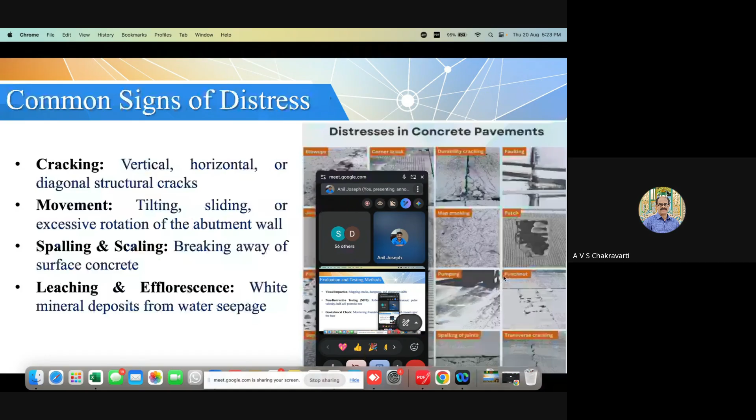So I will start. This is the topic selected for today: From Distress to Stability, Geotechnical Solutions for Infrastructure Projects in Complex Ground Conditions.

I will cover this under four subheadings. First, what is complex ground condition, because any load coming from any structure has to transfer to the foundation and to the soil.

We'll discuss two case studies. One is an embankment failure of a bridge at Mahe Thalassery bypass, and the second is a case study for the protection of a gas pipeline during demolition using the delayed detonation technique for the Supertech Twin Tower at Noida. We will also look into some of the conclusions learned from the study.

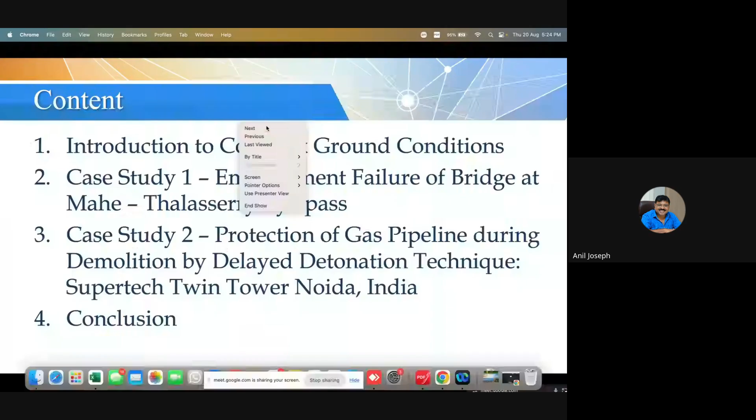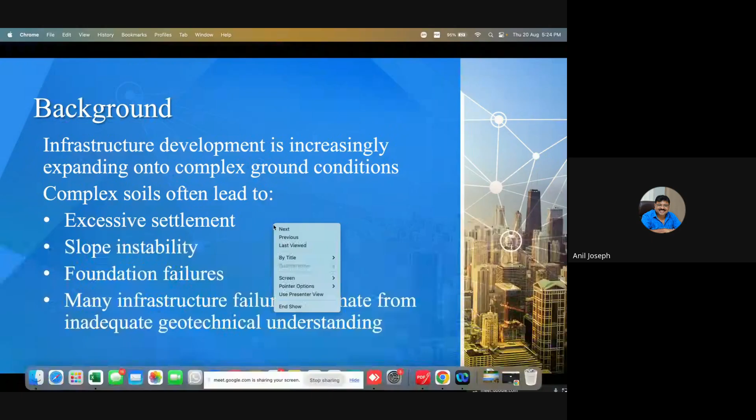Infrastructure development is increasingly expanding onto complex ground conditions. Complex soils often lead to excessive settlement, slope instability, and foundation failures. Many infrastructure failures originate from inadequate geotechnical understanding. So I thought today we would focus on that area, because if you have a strong foundation, you can build very strongly on top of that.

So what is complex ground? Complex ground is soil exhibiting unpredictable or adverse engineering behavior. The common types are expansive soils, soft clays, collapsible soils, organic soil, loose fill, and reclaimed land.

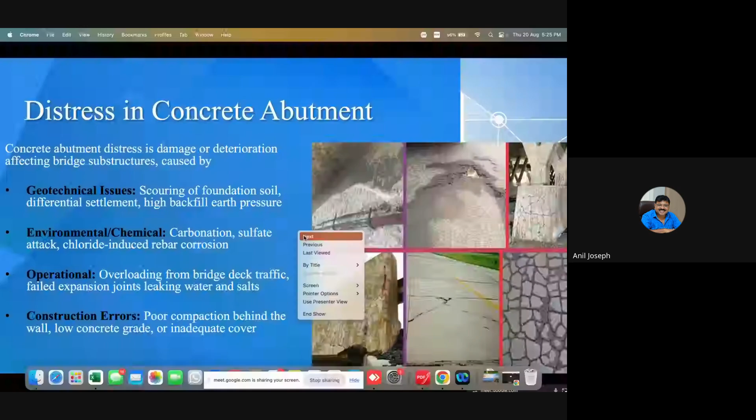Distress in concrete abutments is very common — damage or deterioration affecting bridge substructures caused by geotechnical issues, environmental or chemical issues, and operational issues like overloading from bridge deck traffic or construction errors. These are some case studies where such issues have come up. Common signs of distress in concrete pavements include cracking, movement, spalling and scaling, and leaching and efflorescence.

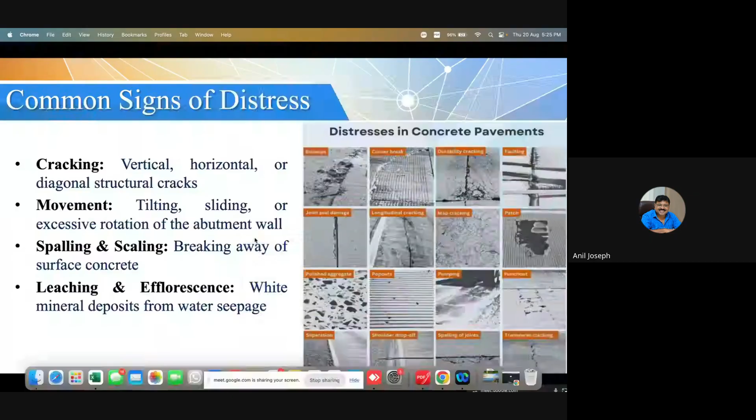Evaluation and testing methods include visual inspection, mapping cracks, dampness and alignment shift, and non-destructive testing like the rebound hammer test, ultrasonic pulse velocity test, half-cell potential test, etc.

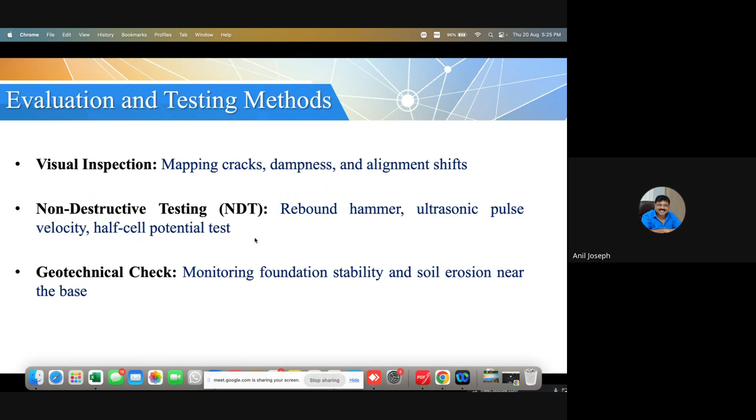Geotechnical checks include monitoring foundation stability and soil erosion. Soils that show instability or low bearing capacity under load can be considered complex soil, and the risks are foundation failure, excessive settlement, and cracking of buildings.

This is a typical case, a building which was constructed way back in the 1170s, and it has started settling, and it went to such a degree that it might fall off. This is the story of the Leaning Tower of Pisa.

I would like to tell a story. The Leaning Tower of Pisa has a strong background in my career choice to pick up geotechnical engineering as my profession. When I was doing my MTech studies, my guide, Dr. M.D. Desai, was selected for a 10-member committee formed by the International Society of Soil Mechanics and Geotechnical Engineering to study how the Leaning Tower of Pisa can be rectified.

So this story goes like that: starting in the 1170s up to 1300, they constructed 4 floors of the structure. This is a bell tower of the Pisa church. And then it started settling.

After about 200 years, in 1300, they started another 2 more floors and put the bell at the top of that. The building started settling due to consolidation of the soft clay, and the settlement was going to such an extent that if something is not done, the Leaning Tower of Pisa will collapse.

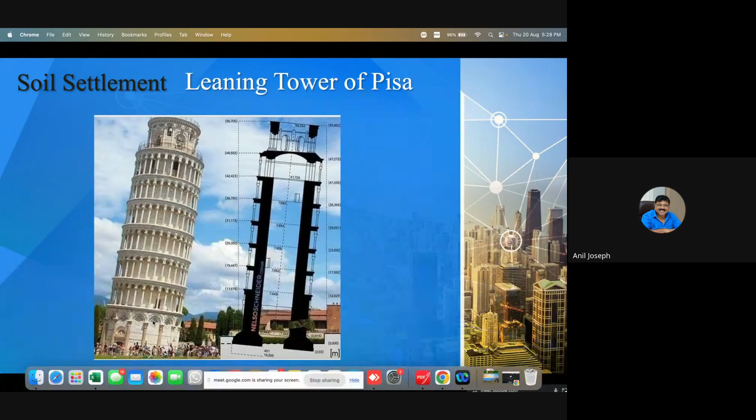So this was the reason why the settlement has carried, and it reached a stage that if it is not corrected, it will lead to a collapse. So this is the bell tower.

In 1990, the tower was leaning at 5.5 degrees and increasing. So after that, restoration work was done to stop it from falling over completely, and up to 2001 they completed the scaffolding.

So what they did was wrap the leaning tower with copper wires, apply pressure, and remove the soil from the other side. The international committee worked on that and put pressure to bring it to a level of inclination, and they came up with a degree at which it could be made perfectly vertical.

Once this idea of making it perfectly vertical came in, there was objection from the people in the city of Pisa, because the revenue of Pisa, a small town in Italy, comes from tourists visiting the Leaning Tower of Pisa.

So what they did was hold a vote, and the majority of the people voted that the Leaning Tower of Pisa should remain leaning.

So finally, they agreed to lean to 3.99 degrees, and it was stabilized in that area so that it is safe for the next 200 years. Strengthening was completed, and it was opened to the public.

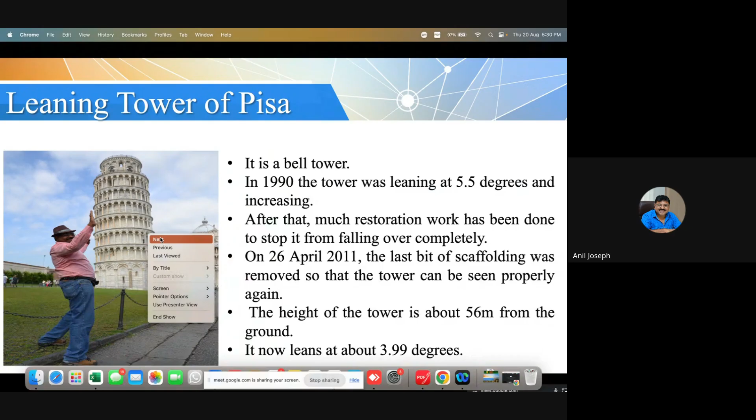This is a photo which I took during my visit to the Leaning Tower of Pisa, which motivated me, showing that engineering technology can be brought in to correct a problem created about 900, almost 850, years back, and we can correct the problem. That was the motivation for me to take up geotechnical and structural engineering as my profession.

The typical distress observed comprises differential settlement of building and pavement, cracking of foundation and retaining structures, landslides and slope failures, and bearing capacity failure and ground subsidence.

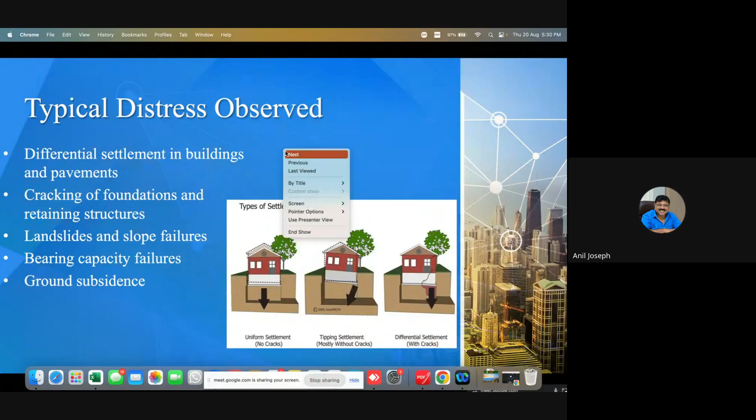So the need for geotechnical solutions: increasing project complexity demands detailed site investigation, advanced analysis methods, and ground improvement techniques. The objective is to ensure safety, serviceability, and durability.

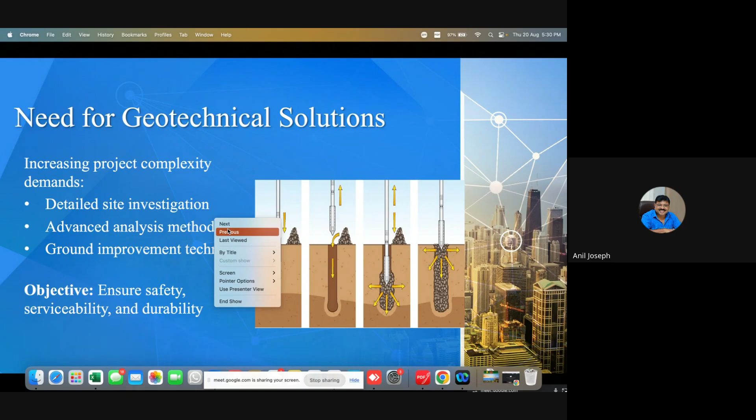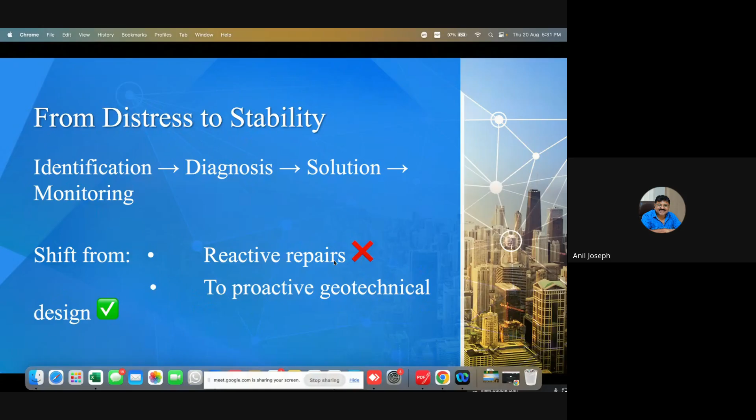So we have to move from distress to stability, and it consists of identification, diagnosis, solutions, and monitoring. So the shift is from reactive repairs to proactive geotechnical design, which is where we have to move.

I will talk about two case studies. The first is the case study of the embankment failure of a bridge at the Mahe Thalassery bypass.

This is the Thalassery-Mahe bypass, expected to resolve the bottleneck drive on the Kannur stretch. 90% of the construction works were completed, and it is becoming the first 4-lane road in northern Kerala, which is in its final phase. With the opening of the road, it will take only 20 minutes to cover between Kozhikode and Kannur, Muzhappilangad. At present, it takes more than 40 minutes to cover the stretch.

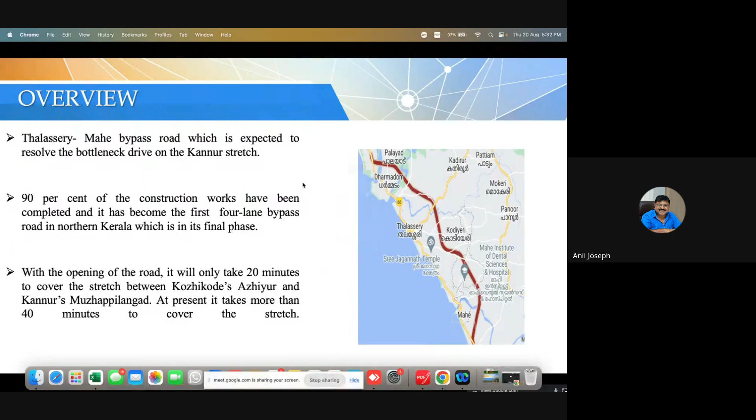These were the contractors for the 4-laning work. Some of the project area was waterlogged prior to the start of highway work and was filled with borrow earth for construction purpose. Subsoil investigation study carried out indicated 12 to 15 meter depth.

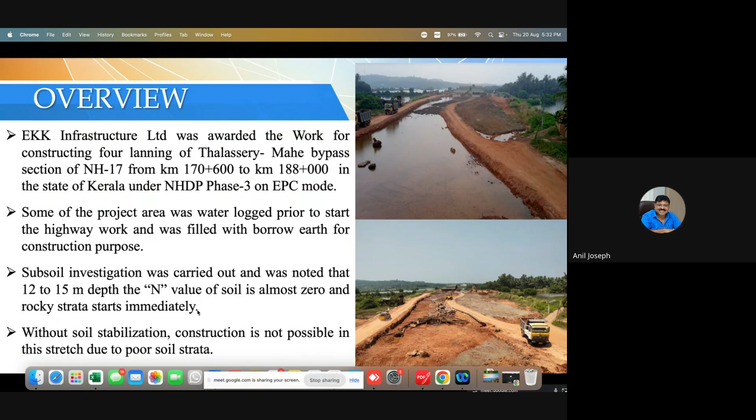As part of the major bridge to be constructed, the embankment at the bridge is designed to a height of 8 meters with provision of retaining walls on either side of the main carriageway, in addition to the retaining wall for the service road portion. You can see this here.

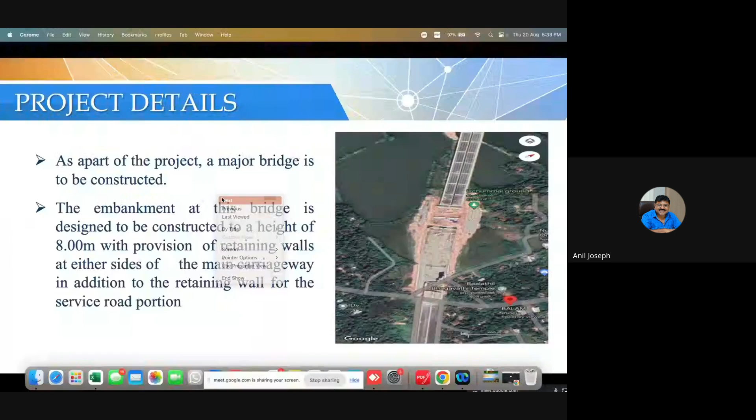Project vendors recommended stone column, PVD, and ground improvement technique, but the recommendation was withdrawn due to high cost of stone column and the time-consuming nature of PVD. As an alternative, spreading geotextile and geocell, after driving coconut piles of depth 7 meter to 11.5 meter, was taken into consideration.

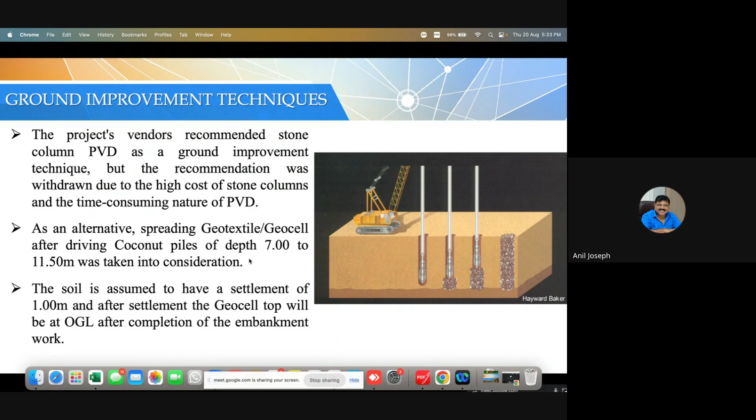The soil is assumed to have a settlement of 1 meter. After settlement, the geocell top will be at ground level after completion of the embankment. That was the concept of the design.

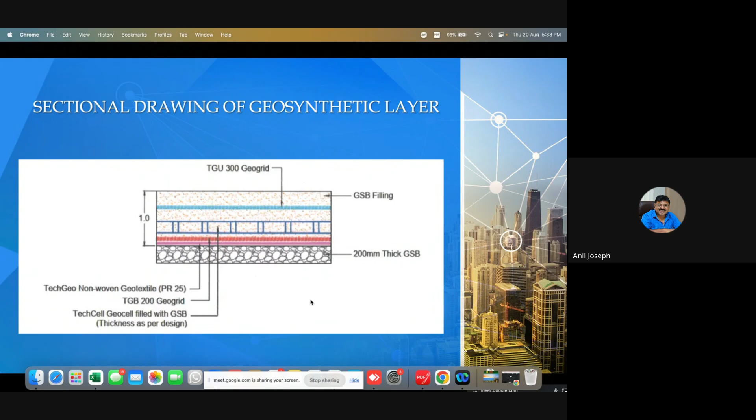This was the design: there will be ground improvement at the bottom, then 200 thick GSB, then non-woven geotextile, then 200 grid TGB, then GSB filling and 300 geogrid, and filling over that. This was the design, and they expected that the pressure will come down.

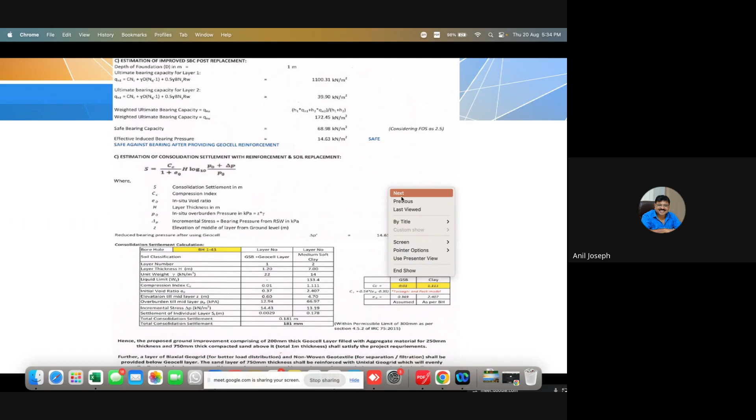Let's see the photographs to understand it better. This was the calculation worked out: there is a pressure of about 16 ton per meter square, and they presumed that after going through the improvement layer, it would reduce to about 2 ton per meter square, which the soil would be able to stand. They expected an 18 centimeter settlement, and bearing capacity to reduce to 1.4 ton per meter square was the calculation conceived.

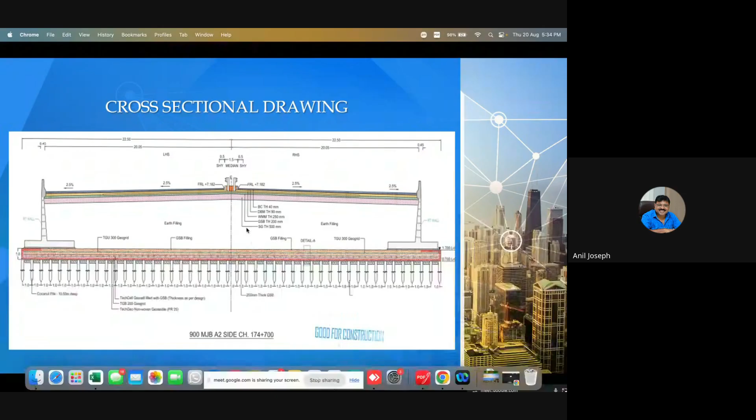This was the working drawing of ground improvement, and this was the procedure. This is the typical section. Coconut piles were provided at the bottom. This is the ground improvement carried out. This is the retaining wall formed, and the completion of the 8 meter filling was planned in detail.

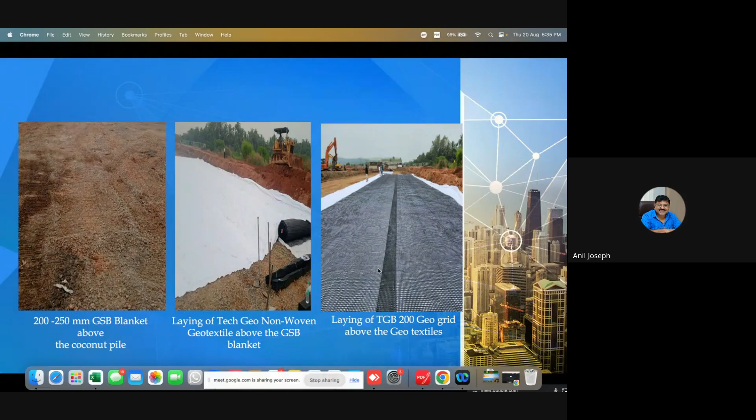These are the stages of construction. First, the driving of the coconut piles, as you can see in the figure. Then 200 to 250 mm GSB blanket above the coconut piles. Laying of non-woven geotextile above the GSB blanket, and laying of TGB 200 geogrid above the geotextile, and laying of TechCell geocell above the geogrid, then it is filled with GSB.

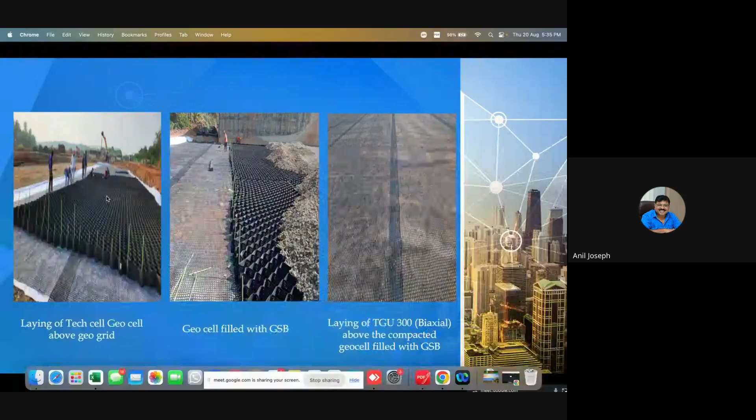This is the TGU 300 biaxial above the compacted geocell filled with GSB, and top layer 250 mm GSB above ground, then top layer 250 mm GSB above the geogrid, and M30 rough concreting was carried out. After the wall construction, earth filling started layer by layer.

Issues observed at site: the embankment work was executed over the geocell stabilization layer up to a height of 6.5 meter, and a settlement of 10 centimeter was observed during the embankment construction. On 9 January 2023, a 20 mm gap was visible in the joint of the cross retaining wall at the center line, and a hair crack was formed in the embankment along the stretch.

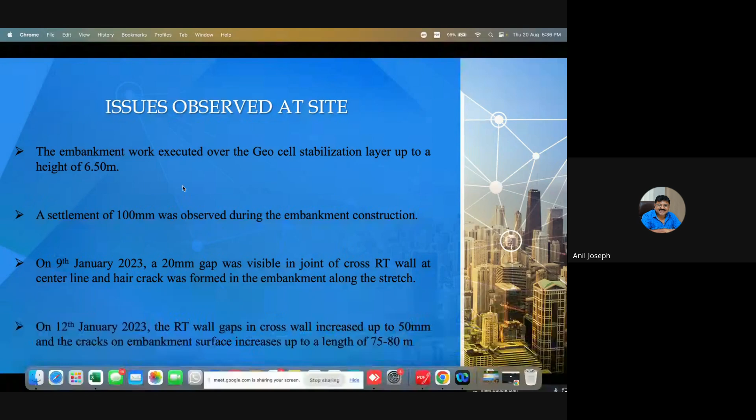On 12 January, it increased up to 50 mm, and cracks started increasing along the 75 to 80 meter line. Cracks started forming. On 13 January, the increase continued going up and reached 11.5 centimeters, and the gap between the two walls started widening to 10 centimeters.

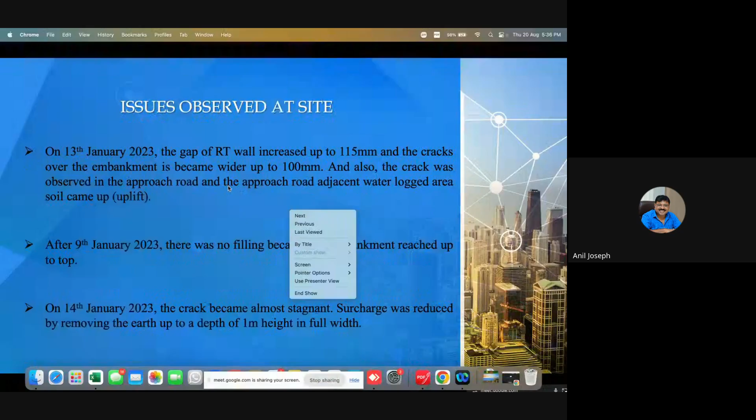After that, the filling was stopped, and on 14th January, the crack became stagnant. The geocell was designed for 14.5 ton per meter without considering the coconut pile, but it failed at less than 10 ton per meter square. Further, a 1.15 meter crust was to be constructed over the embankment, and the RHS embankment moved outward, including the wall.

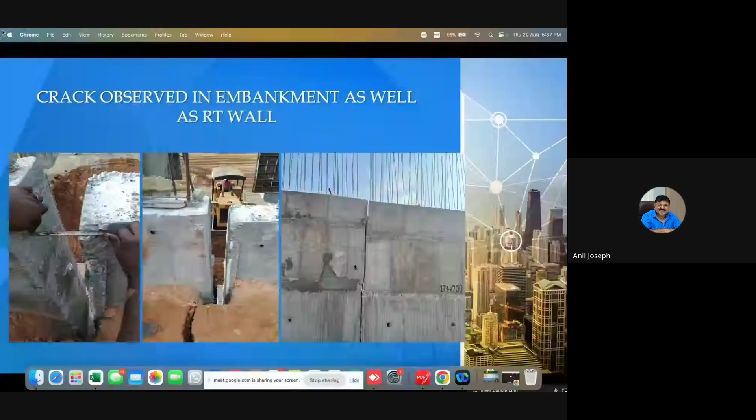So this is the foundation level. This is the mapping of the cracks done, how the cracks are forming, and we observed it for a period to understand what went wrong.

Whenever you do this, you have to do proper instrumentation. It is one area where India has to improve quite a lot. Here you can see an SPT test being carried out, and very softly we went for a vane shear test to understand the behavior.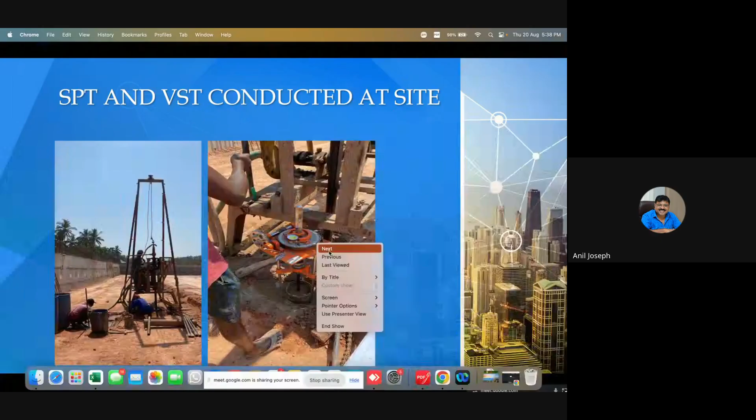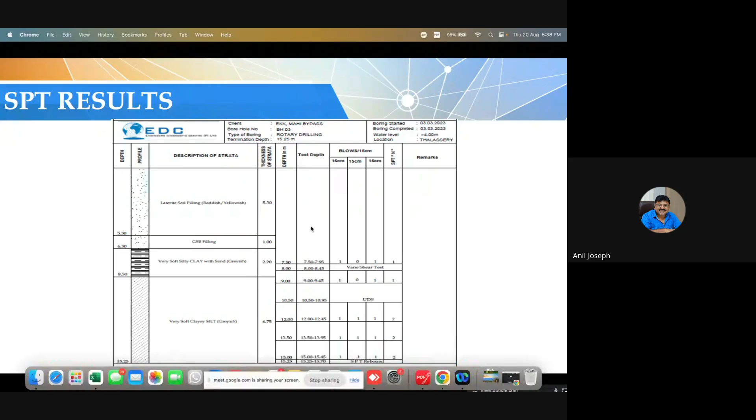This is the SPT results, and we found that from 0, it improved up to 1, 1, 2 like that. So there is not much improvement where the bearing capacity has gone high.

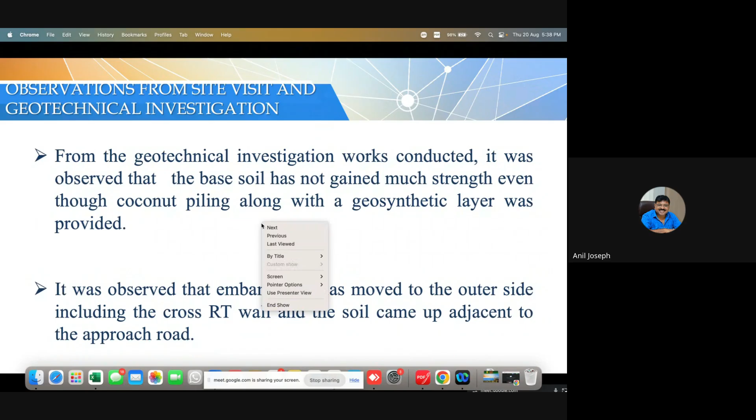So we understood that the geosynthetic layer was not that effective, and the consolidation was not fully happened, and it is very risky to get the loading done.

Now, ground improvement techniques like PVD, sand piling, stone column, deep soil mixing, micropiling, etc. can be carried out, but we have to remove all the fill and restart working, and it will take a lot of time. The inauguration had to be done in another 5 months' time.

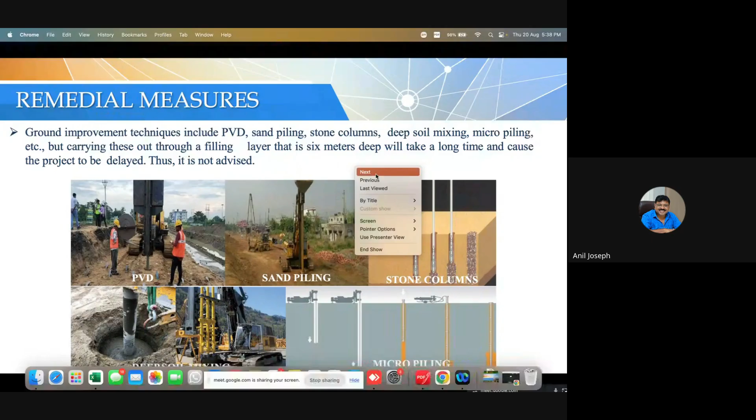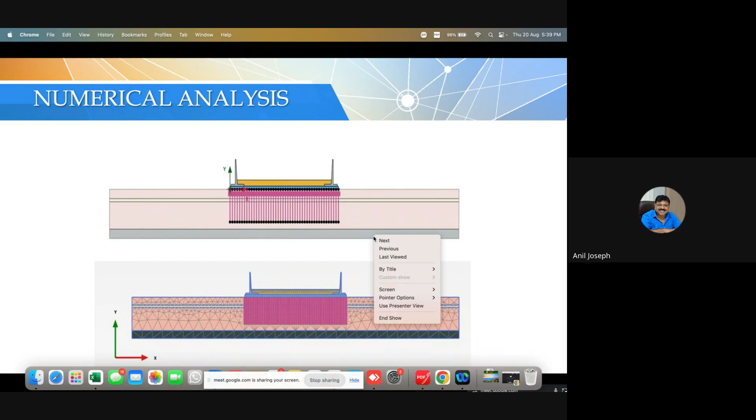So we went for numerical analysis, and a model was carried out using Plaxis to understand how the behavior was happening, and since the coconut pile was there, some sort of stability was there, but the movements and cracks were increasing. We decided to keep it like that, and a balancing surcharge will be formed on the other side, and we decided to go for a concrete slab.

That is, a new span was created. Since the soil failed in bearing, it is recommended that sheet piles or touch piles be used to create a curtain wall around the retaining wall to prevent lateral movement.

As the bearing failure has already happened, the compacted fill of 6 meters had been completed. It is very difficult and time consuming to adopt these technologies.

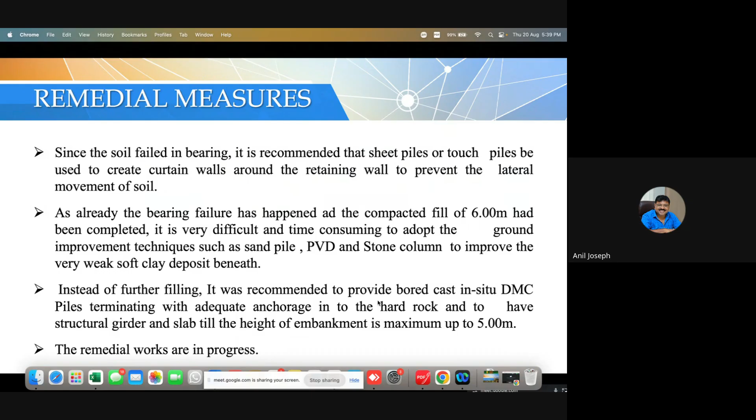Instead of further filling, it was recommended to provide bored cast in-situ DMC piles, terminating with adequate anchorage into the hard rock, and to have structural girder and slab till the height of the embankment reaches up to 5 meters. Finally, we reduced it to 3.5 meters, and the remedial works have been completed and successfully implemented.

It is handed over now.

The case study 2 is the protection of a gas pipeline during demolition by delayed detonation technique for the Supertech Twin Tower Noida in India.

This demolition of Supertech Twin Tower Noida is the second largest demolition by implosion technology in the world, where we used controlled demolition to bring the building down.

The biggest challenge was there was a live gas pipeline within the property, and we could not stop the gas pumping. We had to protect it when this huge massive 40-floor structure was going to come down in a matter of 9 seconds. That was the biggest challenge which had to be completed.

What is implosion? Implosion is a controlled demolition technique where load-bearing structures are collapsed inward using strategically placed explosives. So the concept is, even though it's called implosion, we plan it such a way that we make a plan

so that the demolition explosives are planned staggered in horizontal as well as vertical direction, so that the building falls exactly where we want. We plan it in such a way that at one instant a particular mass of material comes and hits the ground.

If you are talking about theory, it can be done in 6 steps. Step 1, survey the surrounding area, study the building plan, remove toxic substances, remove non-load bearing walls, drill columns, and step 6 is to detonate.

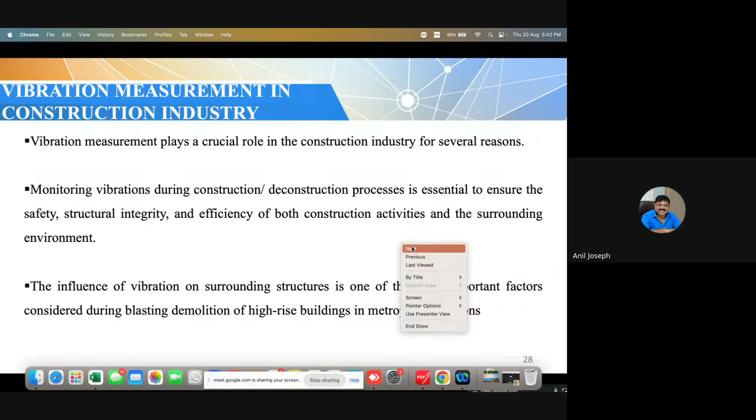Monitoring vibration during construction is becoming very important, and the influence of vibration on surrounding structures is one of the important factors considered during blasting demolition of high-rise buildings, especially in metro areas. So this ground vibration is very critical and is monitored using technology.

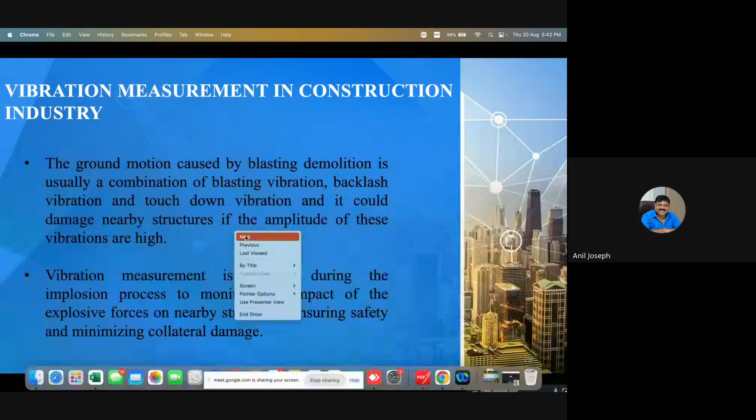And the basic theory is that if you can control the vibration to less than 3.5 centimeters per second, that is the PPV. So when a mass comes and hits the ground, the vibration starts forming, and it can be picked up with an accelerometer. If the velocity is less than 3.5 centimeters, there won't be any damages. Whereas when it goes to 11.5 centimeters and above, there will be severe cracking of the building.

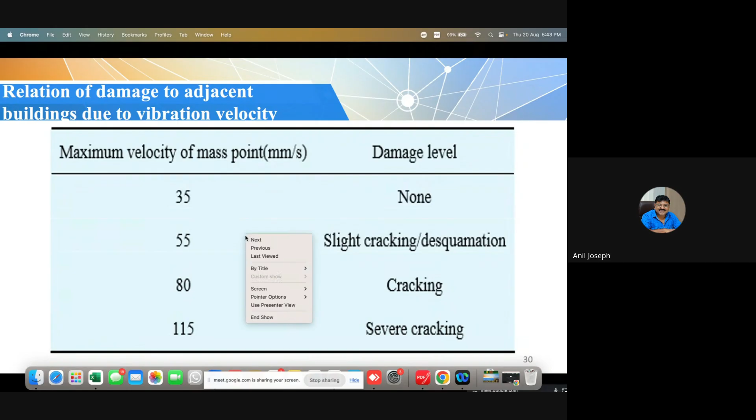So a back analysis is being carried out, so we know how to control the mass to make sure the particular mass is coming and hitting the ground correctly. Now let us see a small video.

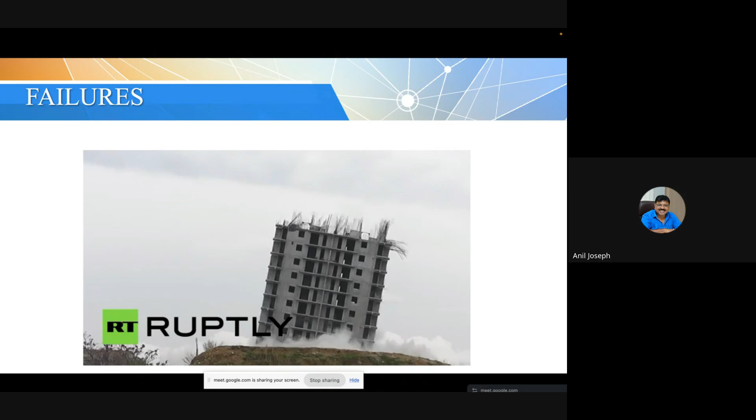This happened in Russia, where they put only less explosive, and instead of the building falling, the building remained standing like that. So generally I work with a company...

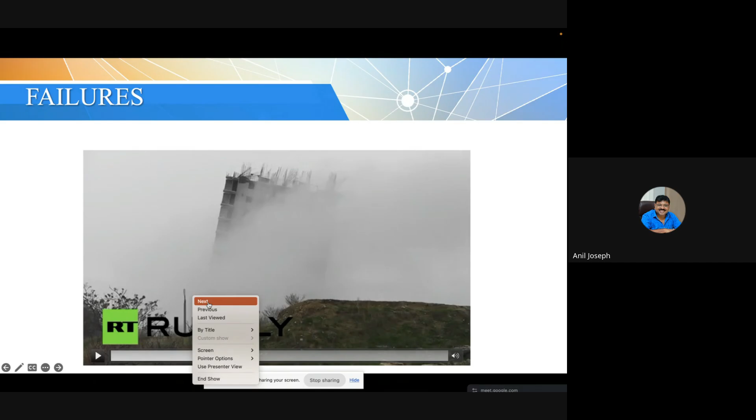...a company from abroad, where our lead consultant always keeps telling us, if you don't do your engineering properly, the building will stand there and laugh at you. So that is what we saw, the building laughing at the engineers who did the job.

Let's see a couple of more failures, so to understand how complicated this job is.

So we saw how complicated it is. Now coming to the case, this is a 7 lakh square feet building.

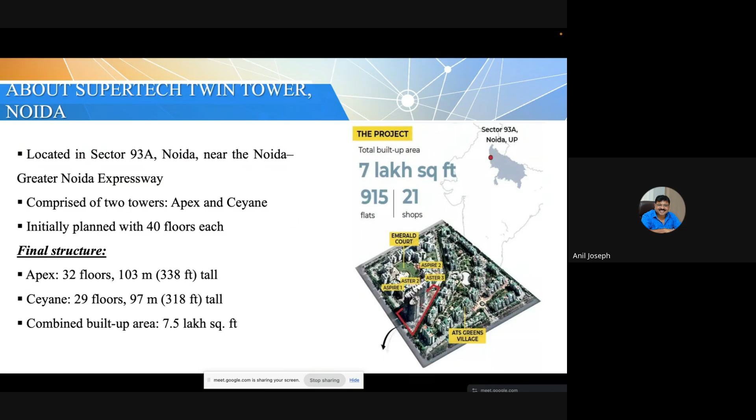It is in 93A Noida on the Greater Noida Expressway, 2 towers, initially planned for 40 floors. Completed at 103 meters, one building 32 floors - Apex - and the other, Ceyane, 29 floors, approximately 7.5 lakh square feet area. So this is the history.

It was previously planned as a park area, and later on they made it into a 40-story building, and the neighbors went to court, and the court ordered the building to be demolished. So this is the building - you can see these are the 2 towers, and it is surrounded by residential buildings.

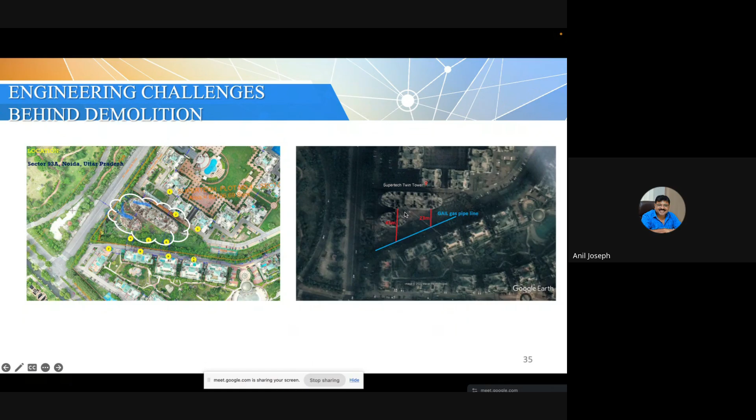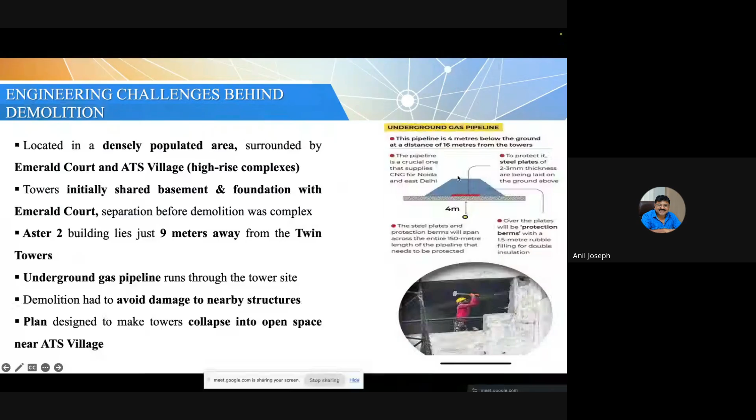To make matters more complex, there is this GAIL gas pipeline running within the property of the building. This is the Aster 2 building, and this is the GAIL gas pipeline. So we did a plate protection, a berm, a geosynthetic layer, and a rubble layer protection to make sure it was safe.

In the initial phase, I used to travel to Delhi once a month. Later on, it became twice a month.

And last 3 weeks, I was camping in Delhi to make sure that we are doing everything perfectly.

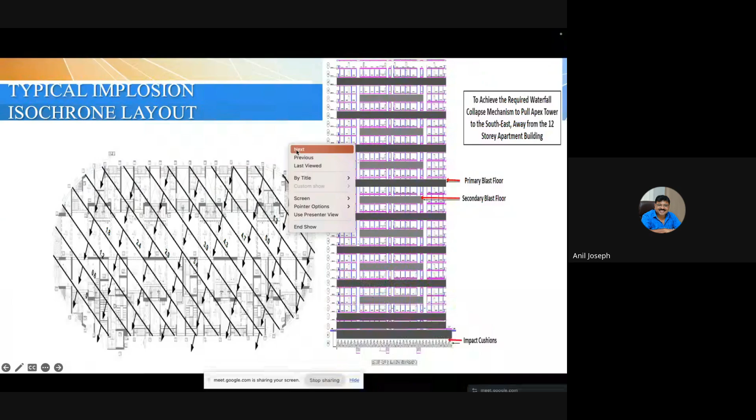This whole process was done in 9 seconds. This is the textbook - if you study it, Edifice Engineering Mumbai followed these principles in the sketchbook: hammer and tongs, stash pit, burrowing in, taking cover, charging it up, lifting it, rip. These are the different stages of how we implemented this job.

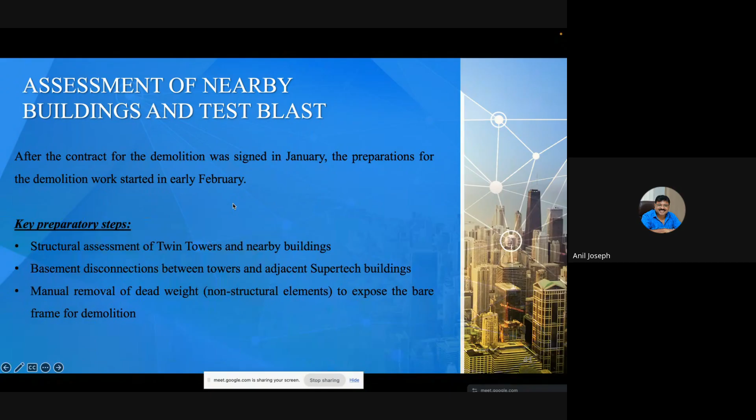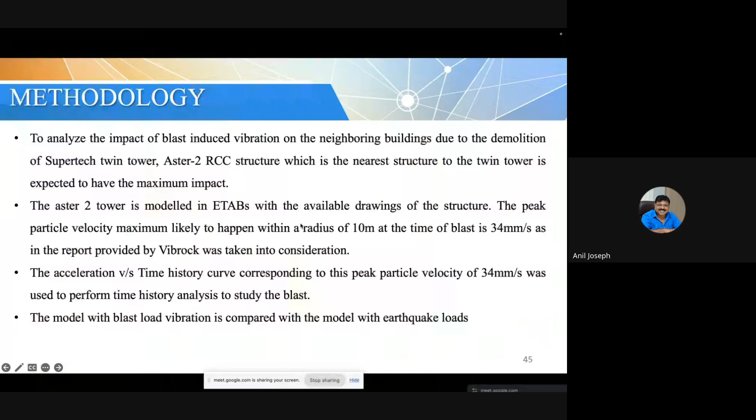We also did pre and post blast surveys of all the surrounding buildings, and recorded all those vibrations and reported notes to the court. CBRI was doing the comparison study and calculation for us. Even negligible cracks were reported to court, and non-destructive testing was extensively carried out in the surrounding buildings, all modeled and simulated like an earthquake wave motion.

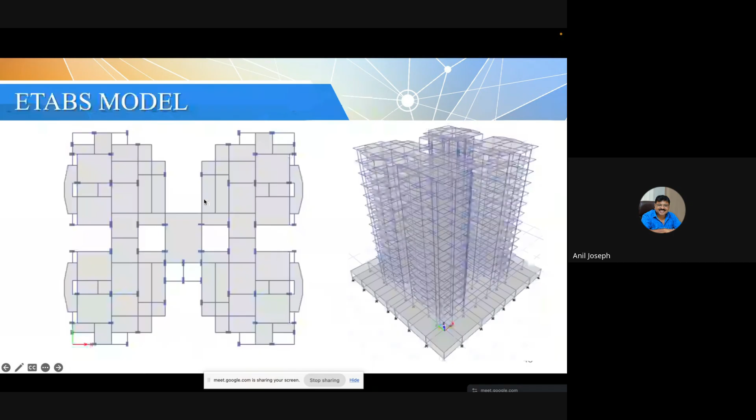The blast wave motion was also simulated, and the structures were modeled using ETABS software to understand how the behavior is going to happen when the waves come and hit the building. This is the three-dimensional model you are seeing, and here is a small video showing how the building will behave during an earthquake - this is the loading animation.

This is the video during the blast, showing how the building is going to behave, so that we ensure as per all codes of practice of IS 1893, everything is within the permissible limit and everything is observed, and we do the prediction of how it can be done.

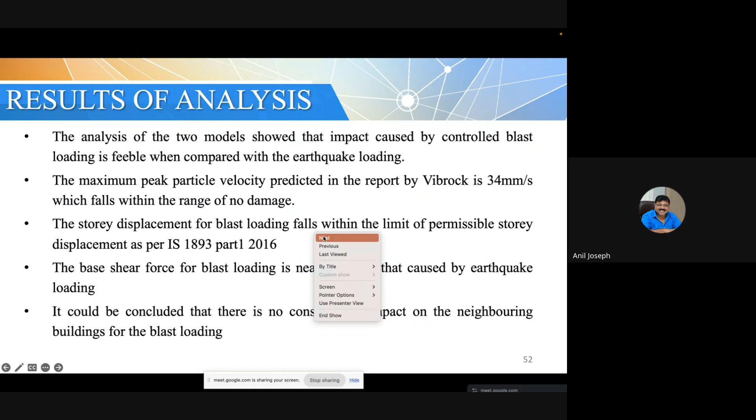This is as per IS 1893 - every displacement, loading, drift, everything is cross-verified. A 9-member team from Geostructurals and IIT Madras was monitoring all the vibrations and picking up the data.

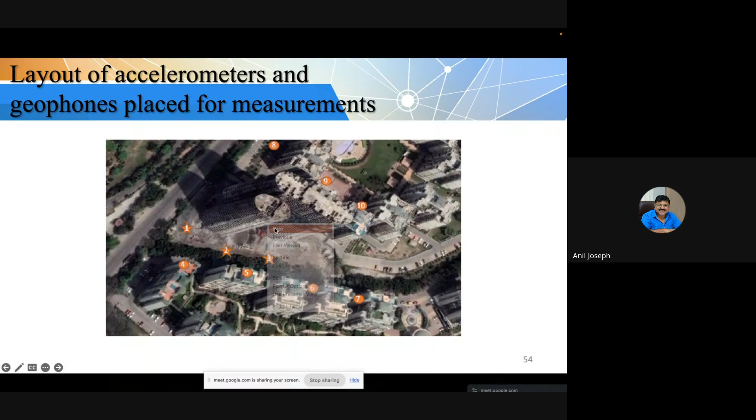These are the points where we kept the geophones to pick the vibration, as well as accelerometers, in order to understand how the behavior is happening. This is the team from IIT Madras, and here we are recording the movements through the accelerometer connected to the computer systems.

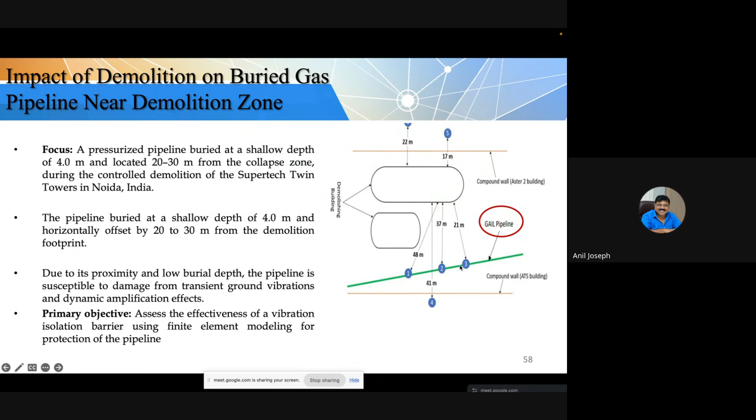So this is the vibration, and here you can see the protection measures carried out for the GAIL gas pipeline. These are accelerometers put in at a certain distance from the building, and here we are recording all the data through the systems.

For the GAIL gas pipeline, this is the buried pipe. We have a geosynthetic layer, first a steel plate, then the geosynthetic layer, then a vibration protection system, simulated using the Plaxis software. Here you can see in detail how it is done.

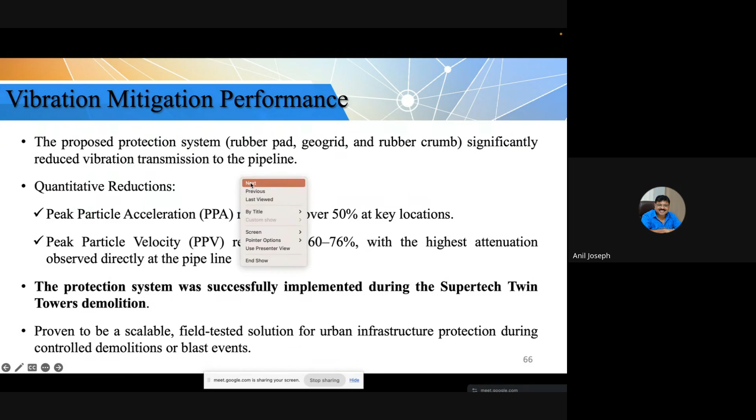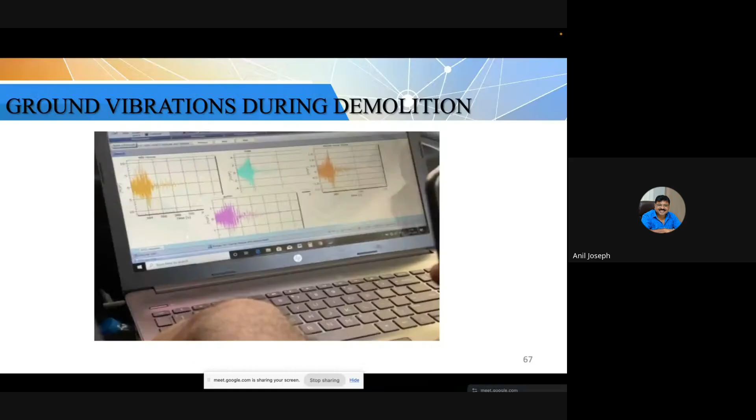Here you can see what exactly happens during demolition - when the material comes and hits the ground, the vibration comes in and it is adjusted against that. These are the different stages of the vibration, all picked up, and we found that everything was within the permissible limit, and we were able to safely and successfully complete the demolition.

Let us see a video of what happened on the 28th of August 2022 when we went for the blast.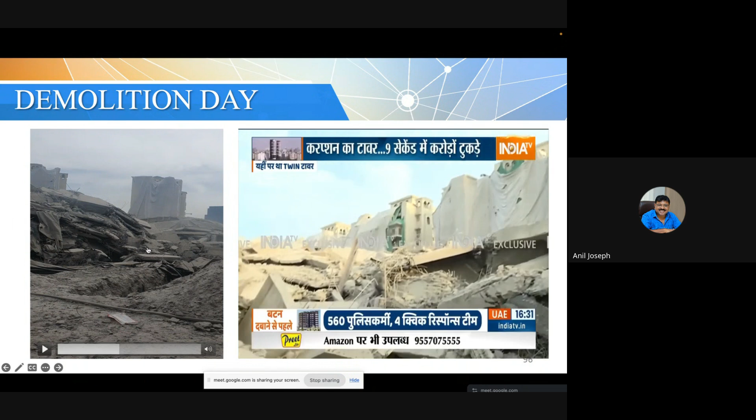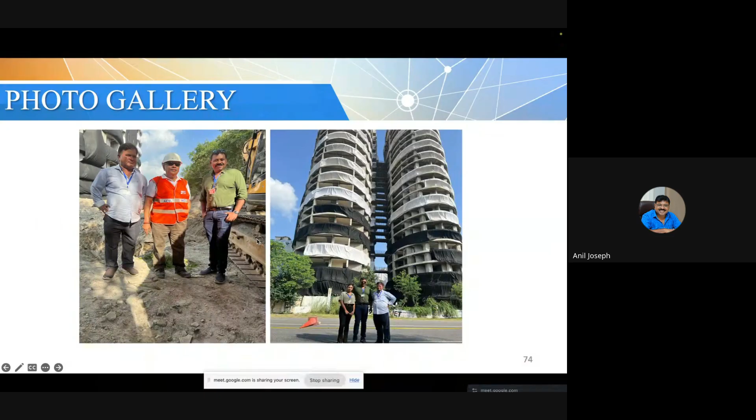Yes, so this is some photo gallery. This is Professor Boominathan and Ramanath from Chennai, Boominathan from IIT Madras, and this is the team who has carried out the blast.

So this is the final video.

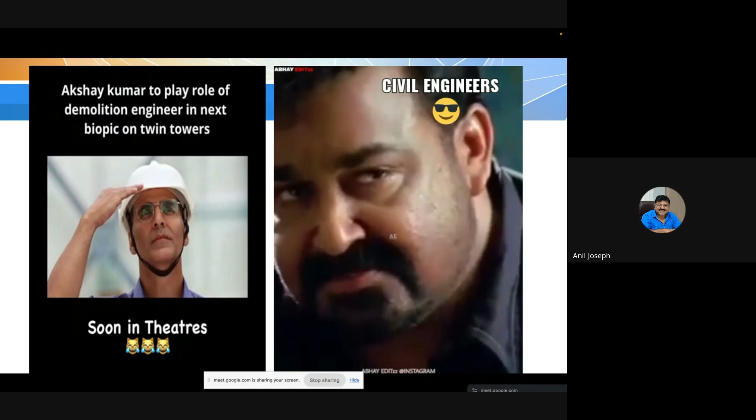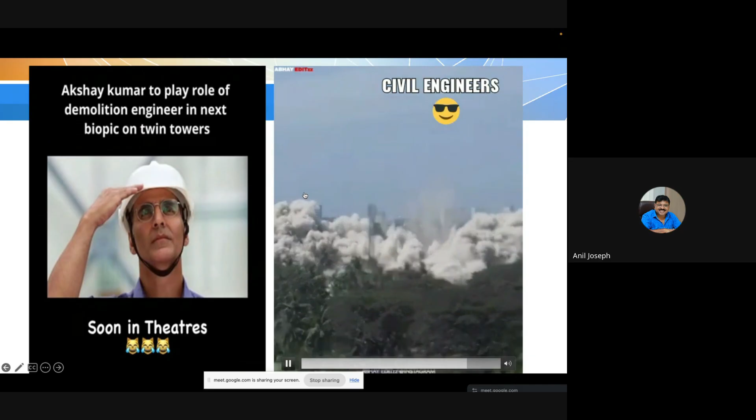So thank you all for the patient listening, and I hope the session was informative.